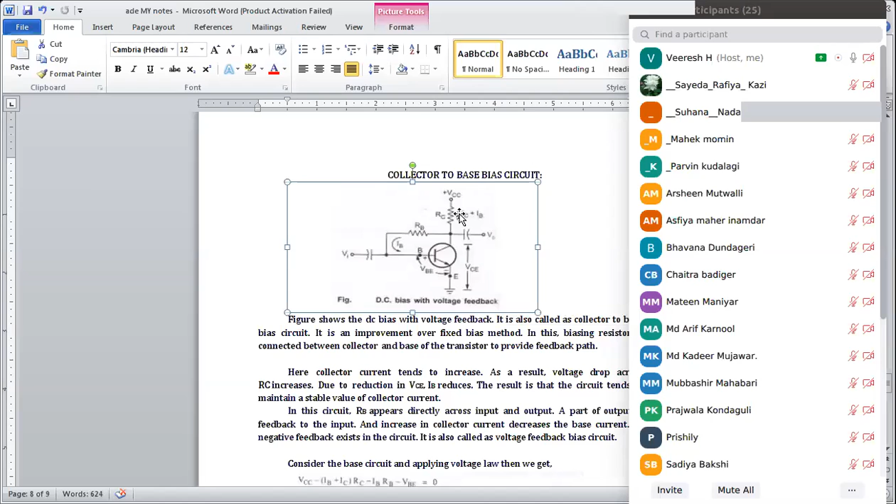That is the reason we are going for the collector to base bias circuit. Another reason is there will be a huge reduction in the base current. We actually require the base current to be very less because we don't want much current to be lost, and we want the collector current to be very high so it can pass through collector to emitter. That is our actual requirement.

So what happens here, as it is written in the paragraph, is DC bias with voltage feedback. So this collector to base bias circuit is also called DC bias with voltage feedback.

So what is this voltage feedback? See what is happening here: the collector terminal, where we get an output, is connected to the base. It is fed back to the base. The current flowing into the collector is fed back to the base terminal through RB. So it is a feedback from output to input, fed back towards the input side. That is why it is also called voltage feedback.

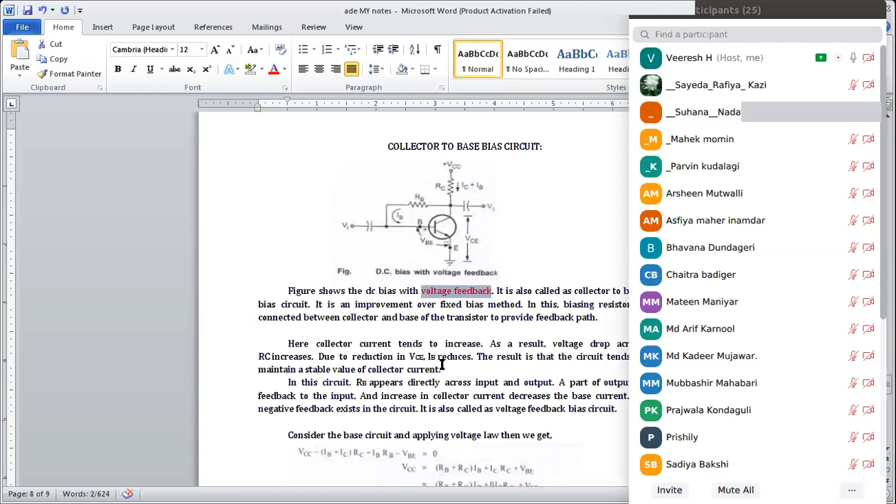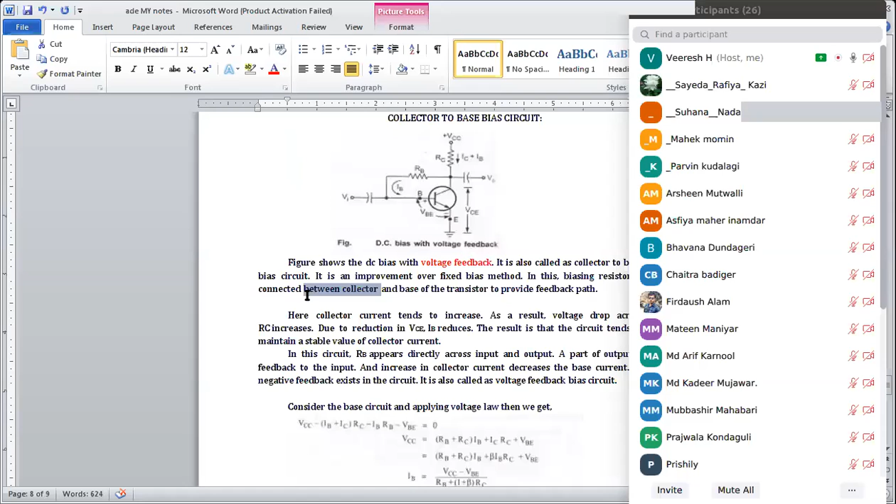DC bias with voltage feedback circuit. Because of its stability, this circuit has higher stability than the fixed bias method, so we are going for this configuration. It is more stable than the fixed bias because the resistor RB is connected between the collector and base of the transistor to provide this feedback, making it more efficient or stable.

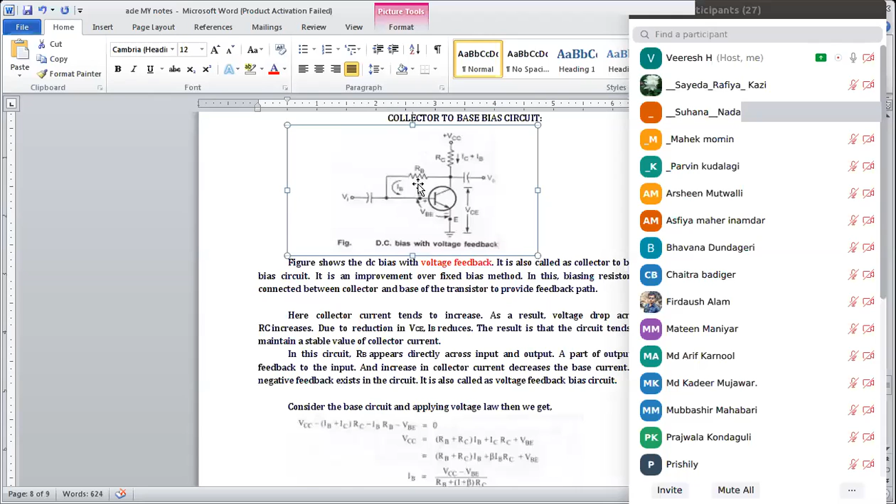So what actually happens is when current starts flowing from VCC through RC, that current is fed into the collector terminal. At this collector terminal, the current is going to be divided. Whatever current we get at this junction, the collector point, is divided: one part flows through the base terminal through RB, and another path goes directly into the transistor.

So here again, two loops are going to be created. We'll see those two loops. Which are those two loops? One is the base circuit, and applying voltage law, what we get is from VCC, RC, RB to the base terminal to the emitter.

So this is one loop, and the other loop is the collector circuit, directly from collector to emitter. As in the fixed bias we also had two loops, one through base and another through collector, here also it's the same: collector to emitter is the second loop, and collector to base and then emitter is the first loop.

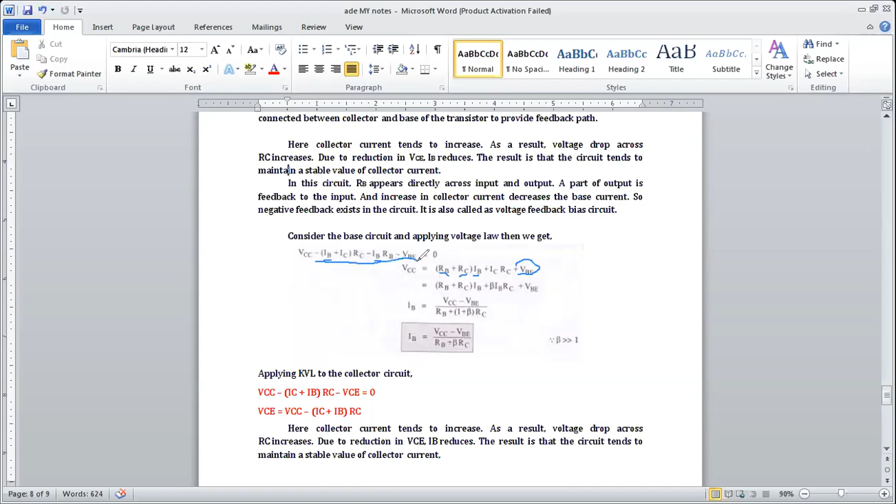Okay, you shift all these terms on the right hand side, so VCC will become this, and then from this, what is our main intention? How much current is going to be flown into the base terminal, because that is the main important thing. So here IB is equal to VCC minus VBE divided by RB plus beta into RC.

So what is this beta actually? This beta is nothing but, this one we have seen, IC is always equivalent to beta into IB. So this beta into IB into RC, you just solve for IB, we will get this expression. Whereas the beta should always be more than 1. Beta is a gain, that in the previous class we have discussed.

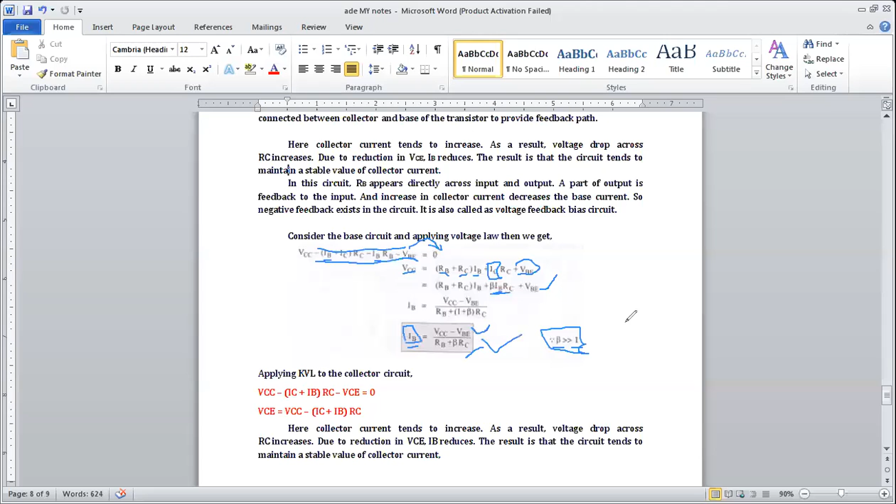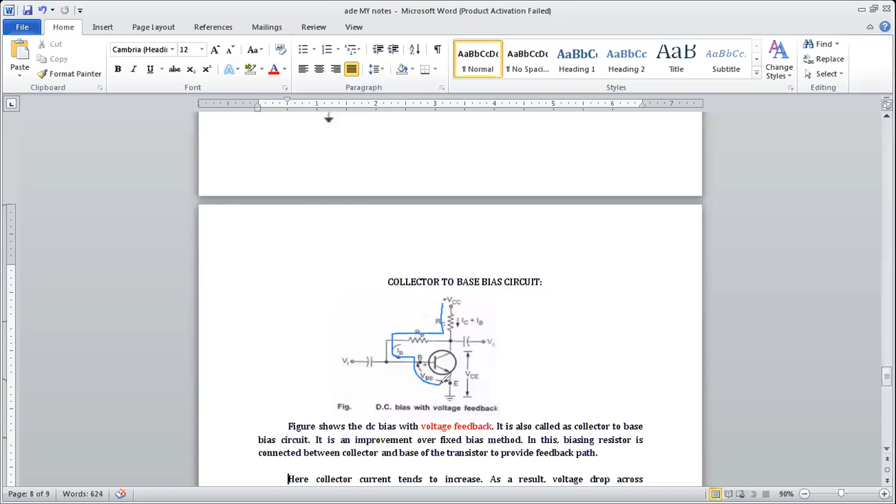So this is for the first loop, that is from where to where: from collector to the base and then emitter. This is the first loop that we have discussed now. And what about the second loop? It is directly from VCC towards collector and towards emitter.

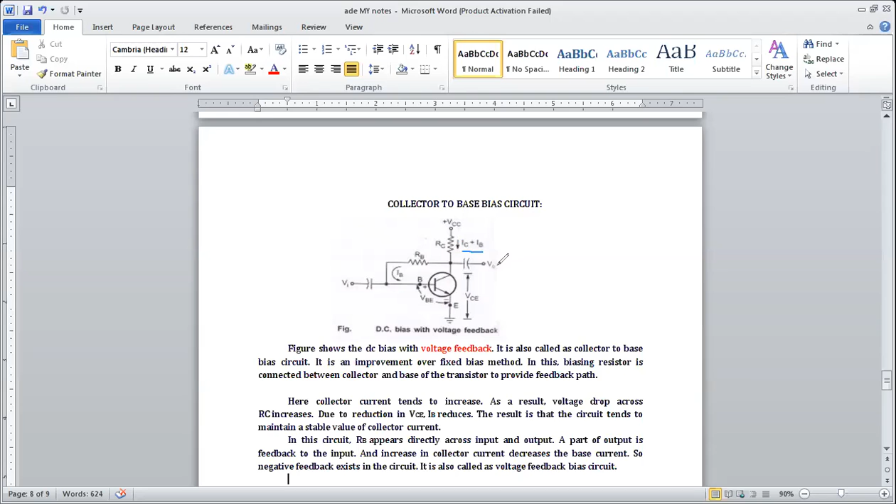So what are the parameters here? One is IC plus IB, and another one VCE, right? So this is the second loop. Whereas VCC is directly applied minus IC plus IB into RC, this is the voltage drop across RC, and then minus another source what we have, VCE, collector to emitter voltage. So that is going to be equal to 0.

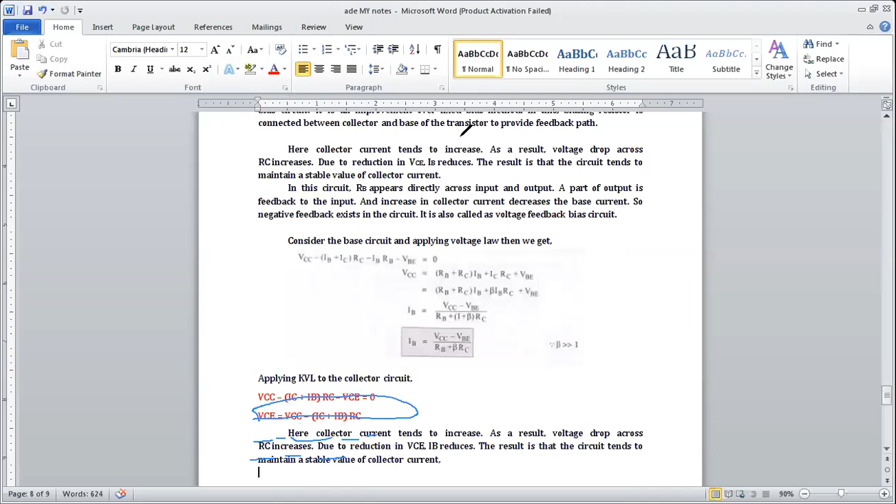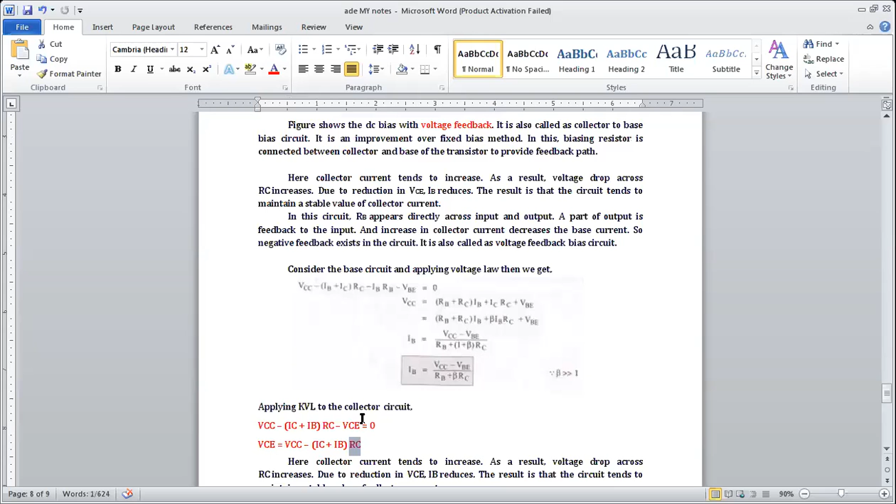And what about VCE that we are going to operate for this transistor? It is VCC minus IC plus IB into RC. So basically, as the current is increasing here, IC plus IB into RC, because the current is more in the collector terminal, the same current is flowing through the base terminal. But again, what we have here, RB, the base resistor.

So because of this base resistor, there is a reduction in IB as well as the VCE. VCE also reduces and IB also reduces, but there will be more current in the collector terminal as it is directly applied here. So this is the reason it is maintaining a stable value. So the collector current IC will remain stable.

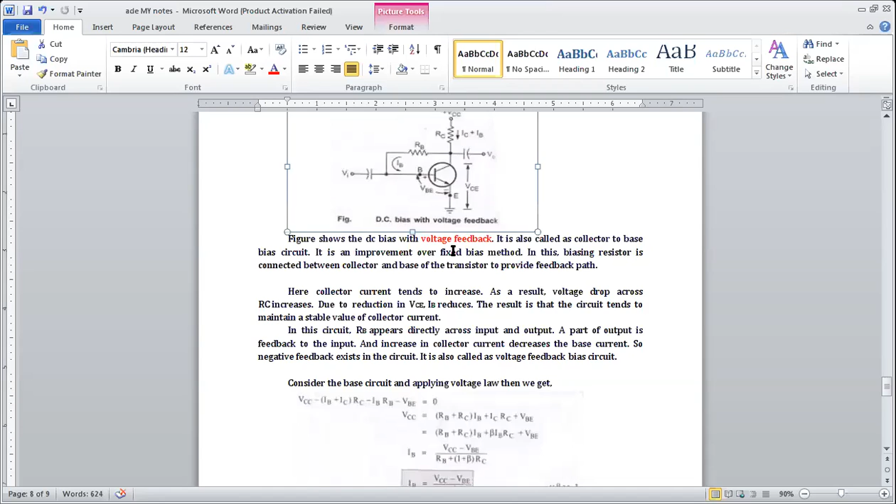See here, collector current tends to increase. The collector current is increasing, and what is happening? The drop across RC increases, so the voltage decreases here at RC. Current increases and voltage decreases. So because of this, voltage VCE will reduce, as well as IB is also reducing, because of this RB. Therefore, the result is that the circuit tends to maintain a stable value of collector current.

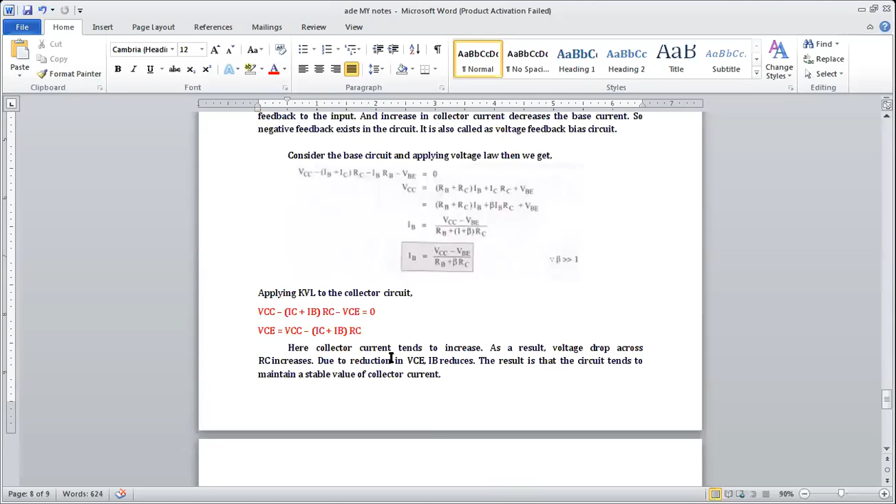Hope you have understood this. Yes, sir. Fine. Yes, sir.

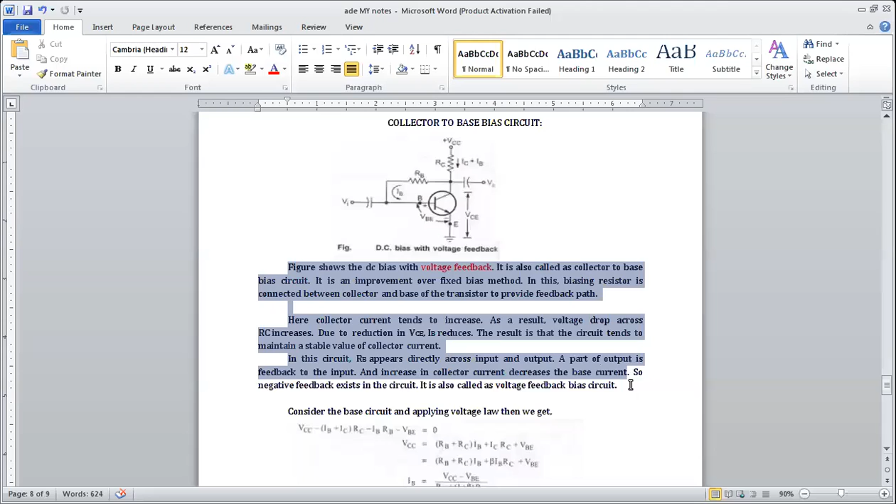Yes, sir, shall I ask just one question for this? What is an advantage of this configuration over the fixed bias? Can anyone tell me? It is in front of you only.

Sir, it helps in improving stability. Yes, stability increases. Because of stability, we are going for this configuration.

And how is it? Sir, because the value of IC is increasing and the voltage across RC is also increasing, so VC will be increased... VCE will be decreased. Sir, VC will not increase here, VC will decrease. Why is VC going to decrease? Because of this RC. Yes, sir.

Okay, and why is the current in the base terminal decreasing? Because of this RB. Because of these two, what is happening? The collector current is more, base current is less, and also collector to emitter voltage is going to be less. If the voltage is less, the current is going to be more, correct?

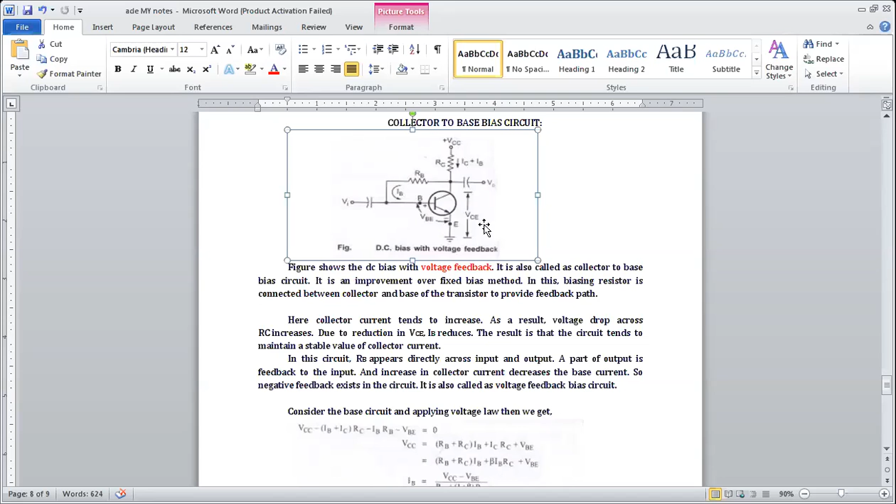Yes, sir. Yes, sir. So that is why the high current is flowing through collector to emitter, and only with the very low VCE and IB. That is our aim here.

Is this okay? The loop calculation? Yes, sir. Okay.

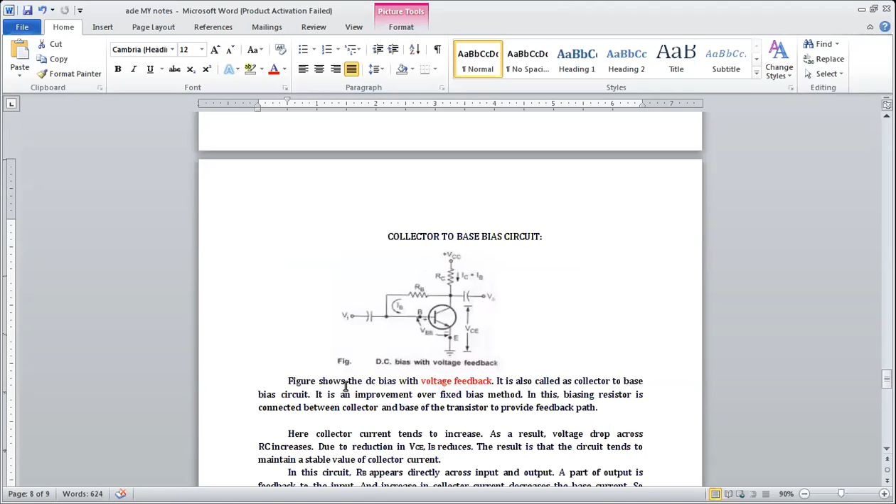That is fine. There is one more configuration you have to study about this transistor biasing, which is the voltage divider bias circuit. So this is the circuit we have here.

Again, this is a comparison with the collector to base biasing. A very good Q point, or quiescent point, stability is provided by this voltage divider bias. So this is one more configuration giving us stability, with a single polarity supply.

Now how is it a voltage divider? See here, the VCC is applied between the collector point and base terminal. For this base terminal, there are two resistors connected, R1 and R2, providing voltage dividing.

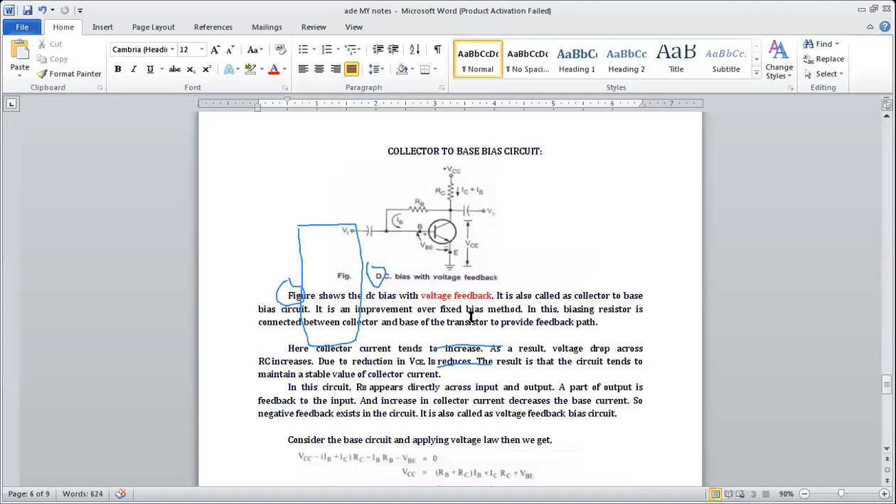Now simplify the circuit using Thevenin's theorem, or locate two main loops. So again we get two main loops here, base to emitter loop and collector to emitter loop. We have seen this before where, for the fixed bias, this is base to emitter loop and collector to emitter loop, two loops.

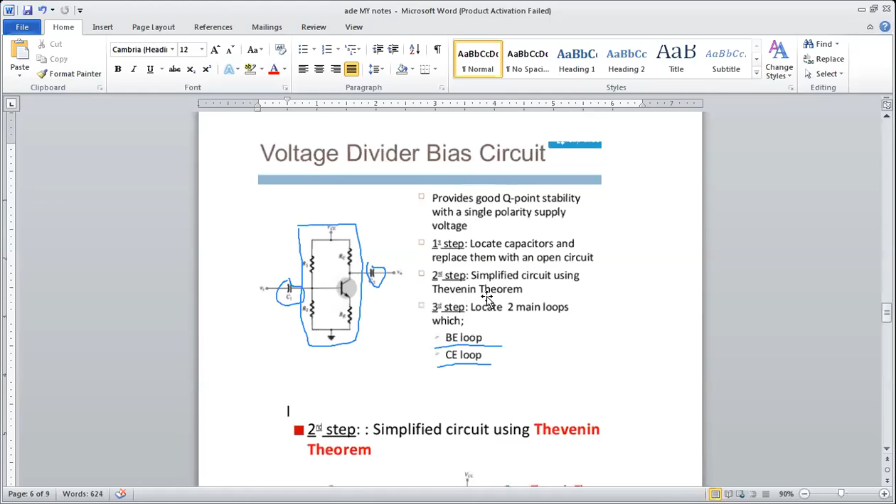Here also same. So now, what is the second step? Simplified circuit using Thevenin's theorem. See, when we remove these capacitors, the circuit looks like this.

Now apply Thevenin's theorem. I hope you have come across Thevenin's theorem. Have you heard about this? No, sir. Okay, Thevenin's theorem, in a simple way, I'll tell you.

It is a calculation of all the resistance and all the voltage sources in a circuit, or we are making an average of the complete circuit voltage and resistance. We call it Thevenin's theorem. Okay, so here—

This is our main circuit now after removing the capacitors. Now these two resistances R1 and R2 are providing the voltage dividing concept. So here, for the calculation of R1 and R2, as they are connected in parallel, what is the resistance we will get from this R1 and R2?

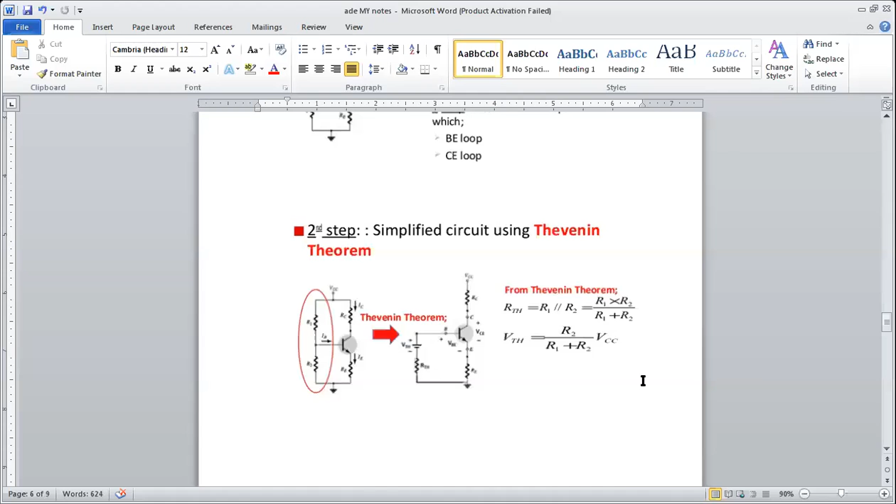If suppose R1 is 1 and R2 is 2, how much do we get? 2 into 10 is 20, divided by 3, that is 6.6. Yes, again the voltage is divided here. In the total of 10 voltage, R2 is consuming 6.6 voltage, and the remaining 3.3 voltage is consumed by R1 resistance. Okay, so this is how the voltage is going to be divided. This is the voltage divider circuit. Understood? Yes sir, yes sir.

So here we have to calculate RTH and VTH. RTH is the total resistance applied here, and VTH is the total voltage applied on this base terminal. So this circuit will become like this after Thevenin's theorem.

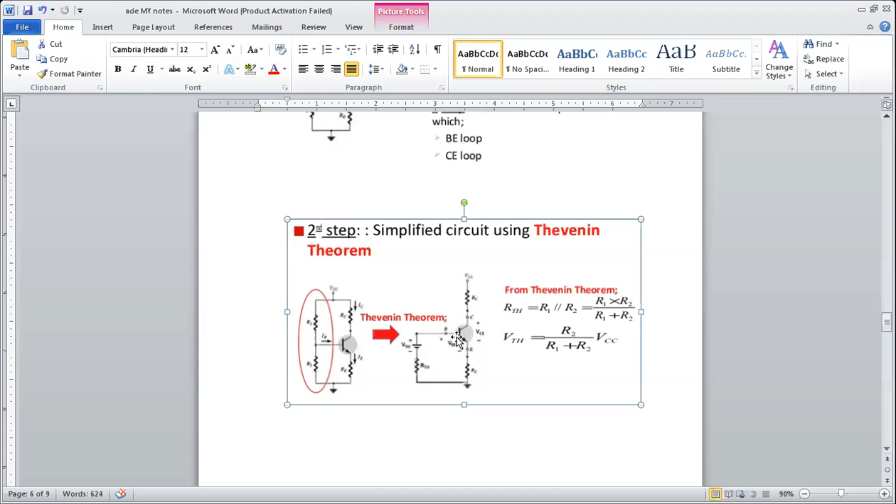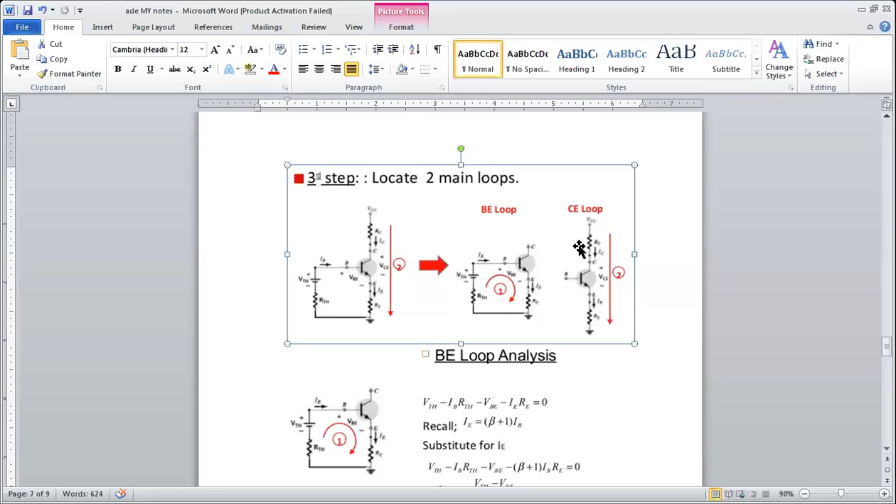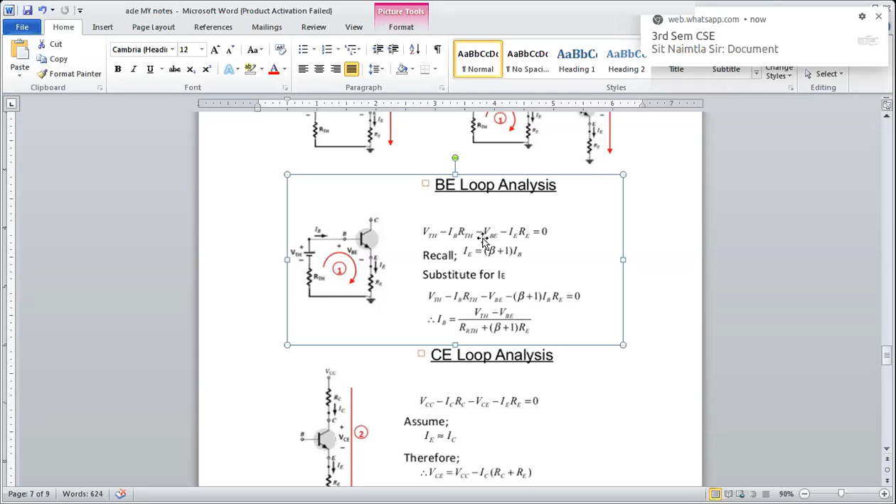So in the third step, we are locating the two main loops here. From this circuit, what we are getting: one is base to emitter loop, another one is collector to emitter loop. So again, when we apply Kirchhoff's voltage law, we will get IB. You can easily calculate this. This is the first one: VTH minus IB into RTH minus VBE minus IE into RE.

So again, okay, one more resistance we have added here. In the previous two configurations, we did not have RE, emitter resistance here. Now we have RE here, so IE into RE. We basically know that IE equals beta plus 1 into IB. So when we substitute this for IE, the IB will become this expression: VTH minus VBE divided by RTH plus beta plus 1 into RE.

And when we apply Kirchhoff's voltage law on the second loop, VCE, we will get VCC minus IC into RC plus RE. So we can compare this.